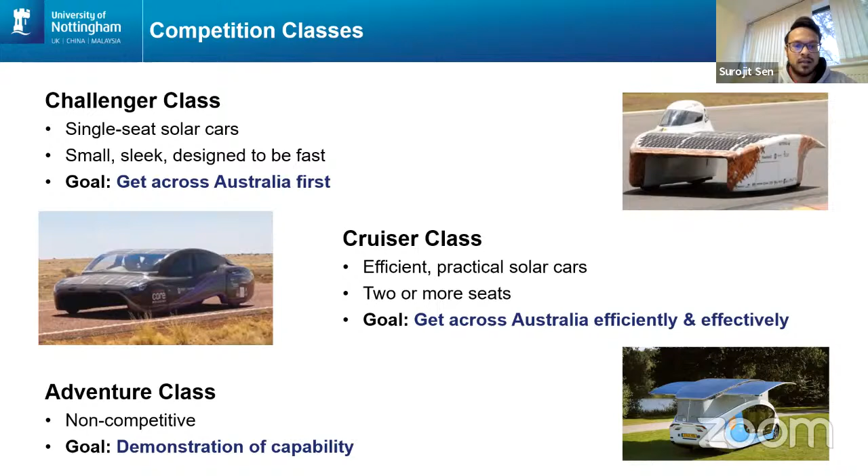Thank you, Alex. Okay, so these are the 3 main classes, and we are planning to enter our first solar car from University of Nottingham in the Cruiser class in 2023 October, which is next year.

So why should we follow the World Solar Challenge? There were several reasons, some of which I have noted down here. It's a showcase for new technology and innovation. Currently the best cars in the world that make efficient use of solar technology enter this competition. So it's not just a student project, it is actually one of the biggest events where the best that the world can offer in terms of solar technology for transportation is presented in this competition. So many people, there's a lot of coverage, a lot of PR for this event.

And also it's a really good competition for students who want to enter the area of sustainability when they graduate. Many big companies recruit students right away attending this competition.

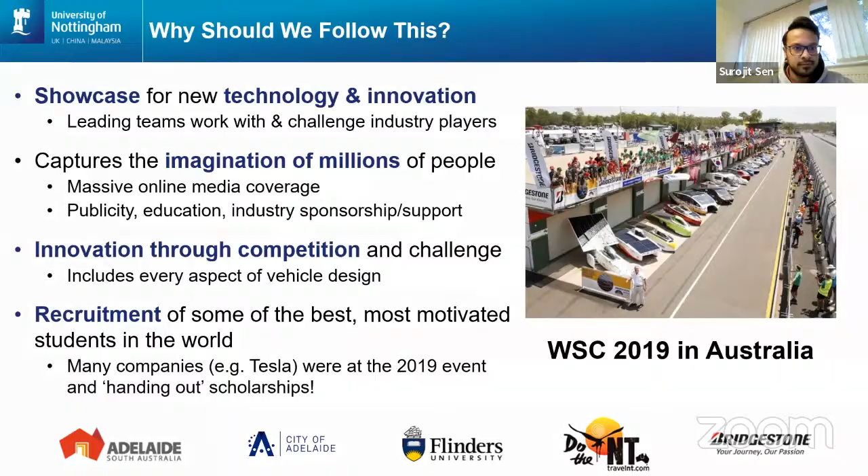All right, so that was about the World Solar Challenge. I'm going to quickly spend a few minutes looking at the top 2 teams as I see it.

So the first one is the University of Eindhoven, which is in Netherlands. They have been doing the Cruiser class for so many years now, and they are by far, in my eyes, the best teams. They're really pushing the envelope in terms of producing cars which are actually very, very practical.

So Eindhoven, in the previous slide, that was a Cruiser class competitor. Now this one is University of Twente, which is again in Netherlands. They really specialize in the Challenger class competition. So this is the single-seater, not practical, but at the cutting edge of the technology.

These cars do the entire 3,000 kilometers with no charging stop. So they start at the start track with a full battery, and they are driving the entire distance purely on solar power. Again, there are quite a few cars they have been building over the last few years.

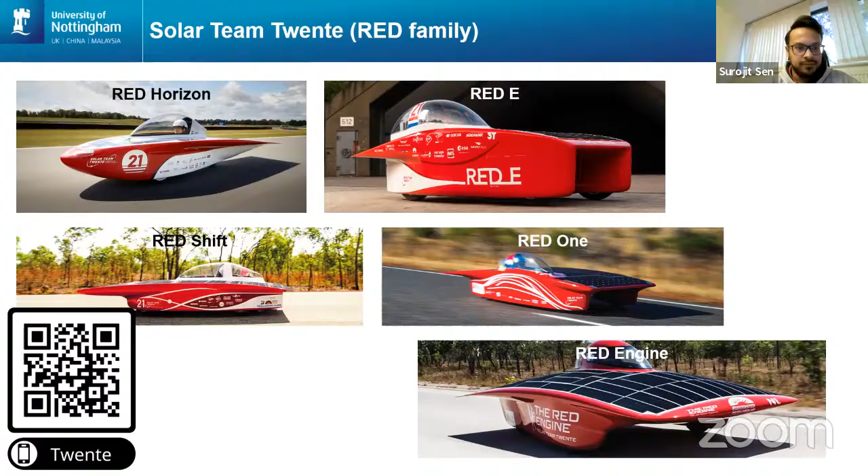Okay, so how to design a practical solar car. Now, this is the most interesting bit of my presentation, I think. We've set the context about what the competition is, why we want to follow that competition, why we want to build a car for that competition, and which are the top teams, so the teams that we really should be aiming for. So now, let's look at how we actually design a practical solar car.

Okay, so it really is a step-by-step process. It's not rocket science. If you just follow a simple set of steps, anyone can build a solar car. It's not that difficult. So the design process happens over a period of 12 months.

That is how we do in the University of Nottingham. So we spend the first 12 months designing a good car, and the next 12 months, it's a 2-year cycle. The next 12 months is focused on manufacturing and testing the vehicle.

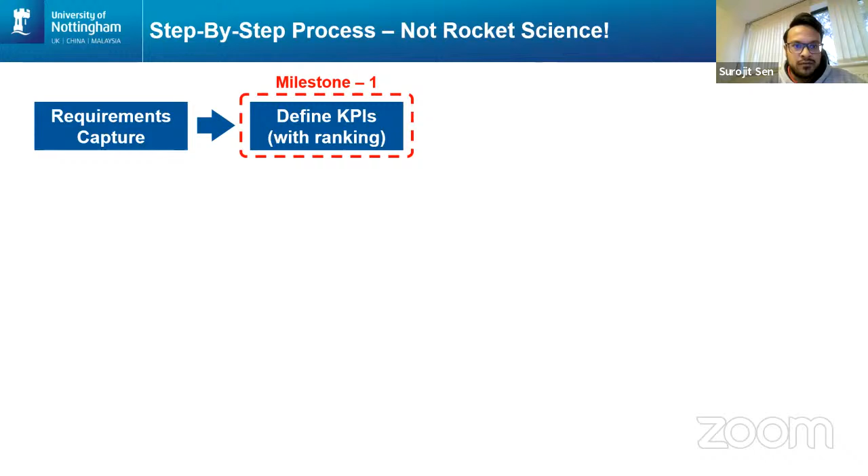Okay, so first milestone is requirements capture and define the KPIs. The KPI stands for key performance indicators. That's milestone number 1. We should be aiming to finish that in the first month of the project, so 1 out of 12 months.

Next milestone is choosing the favorite layout. So after defining the KPIs, we want to explore different layouts of the vehicle. So where the seats go, where the passengers go, where the battery goes, what's the wheelbase of the car, where do we put the wheels, for example. And that's once it's an iterative process, so different vehicle layouts and trying out different aerodynamics of those layouts.

There's a bit of a back and forth in that process, but by the 3rd month of this 12-month project, you want to get to milestone number 2, which is choosing a favorite layout, the one that offers the most promise.

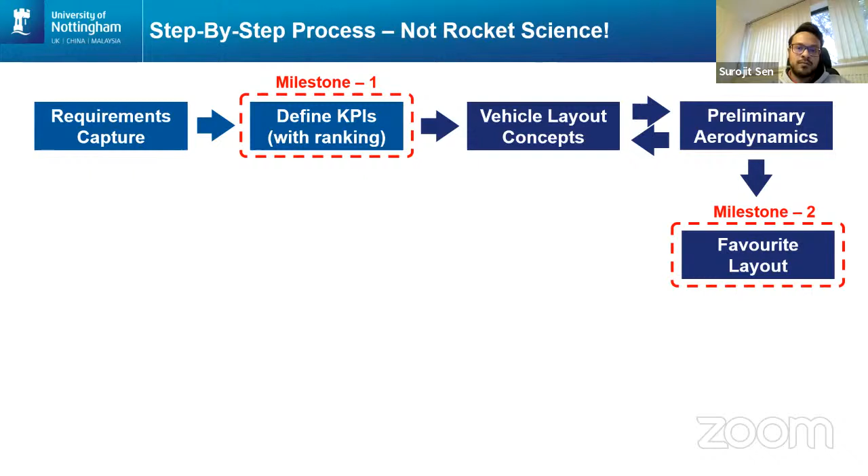Next step is actually starting to design the car. So the first step in the third milestone is to break down into multiple systems. For example, the chassis, the powertrain, the bodywork, the electrical systems are all separate subsystems. So at this stage, after 3 months of the project, the team really wants to split into different subsystems of the vehicle. Each subsystem then goes through a design and validation process.

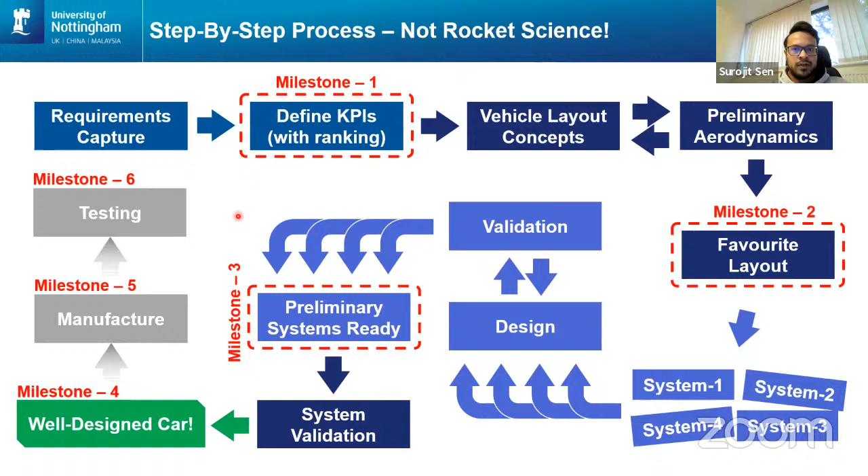The last 2 milestones are milestone 5 and 6, where you actually manufacture and test the car. This would usually happen in year number 2, where you want to spend the first 6 months manufacturing the car and then the latter 6 months testing the car. So hopefully that all makes sense, and we will now go into a bit more detail on milestone 1 and 2.

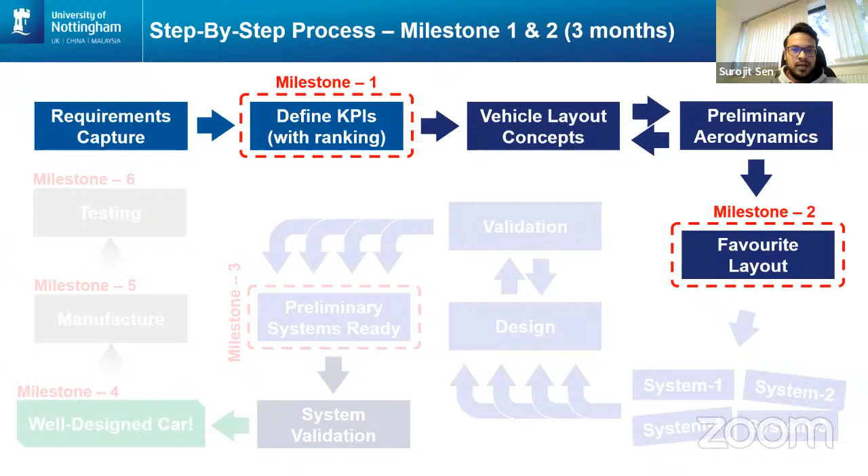As I said, milestones 1 and 2 should ideally be finished in about 3 months of the project, which is about a quarter of the project duration. It is very important to spend some good amount of time talking to people, trying to set targets that are realistic and ambitious together, finding the exact balance between realistic and ambitious. That's very important. It's very easy to start off with one particular concept which you have not explored, so it's very important to have many competing concepts, explore all the ideas possible, and start from a position of informed decision.

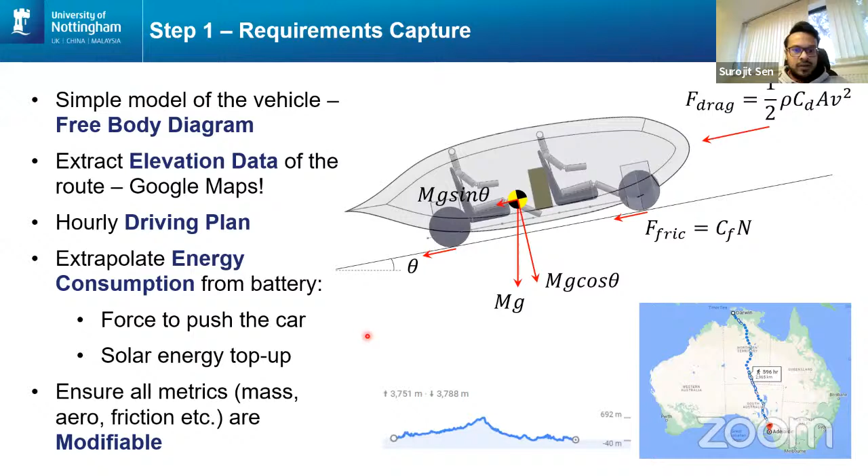From this, you want to extrapolate the energy consumption for the battery, because at the end of the day the whole project is just about making an efficient car. So how do you make a car efficient? You need to make sure that you are consuming the least amount of energy from the battery to push the car through the wind.

Once you've set up a model like this, hopefully you should have something that looks like this. On the top, you can see the vehicle model, which gives a rough estimate of how much energy is needed to drive in each stint of the travel. I've split that into 3 stints, so at each stint you get to charge once. At Tennant Creek, for example, you charge once, and again you can stop at Coober Pedy and charge for the second time.

So this is a very simplistic model based on Microsoft Excel. Many teams do it in a much more complicated way, but as a starting step, you really don't need to go complex. As I said, it's all Newton's law of physics, and it's just school maths, really. So as you can see on the far right, I have estimated the total energy that's consumed from the battery.

Next one is the sensitivity analysis. That's the second most important part of this whole exercise. The sensitivity analysis tells you which metric, like speed or friction, affects the energy consumption the most. At the end of the day, the objective is to minimize energy consumption, so you want to know what metric of the car to change so that you're consuming less energy. That's what sensitivity analysis does.

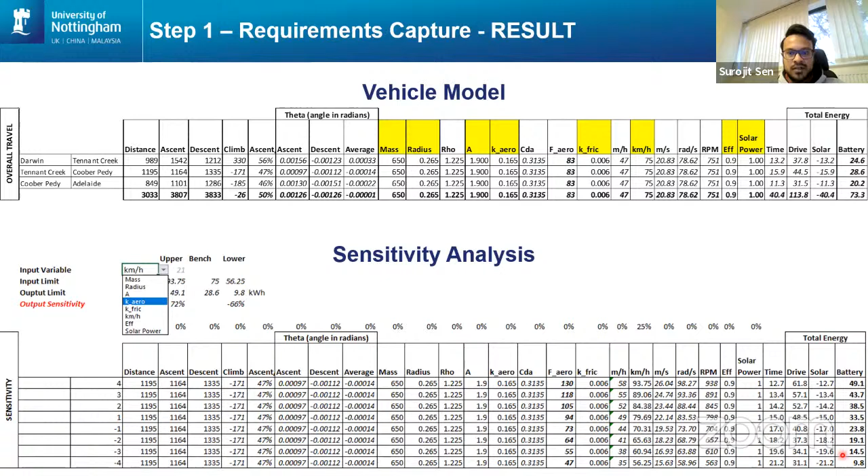Okay, so what we have found based on these analyses is that optimizing aerodynamics is the most important bit, which makes sense because you want to drive efficiently at a decent amount of speed, so you're not driving really slow. Some of you might know aerodynamic drag is directly proportional to the square of the velocity. So as the car drives faster, the maximum amount of energy from the battery is consumed to cut through the wind, basically.

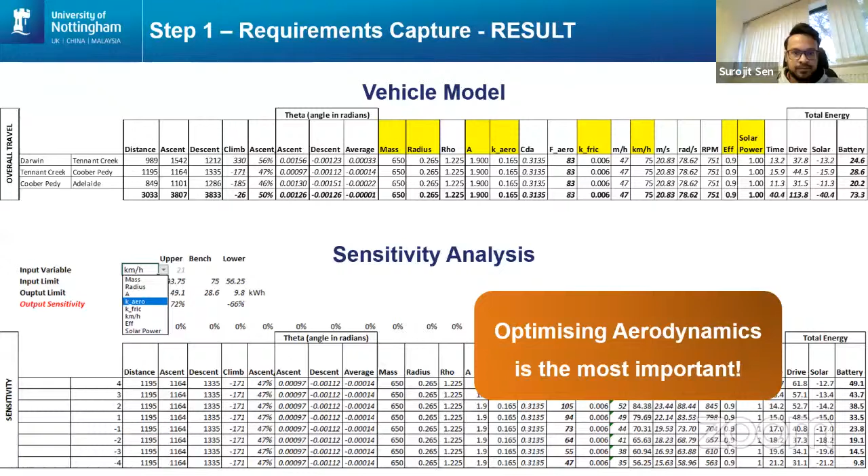So from all of that step, what you want to arrive at is to define a set of key performance indicators, or KPI targets. These are the KPI targets that we have set within the team: coefficient of drag, front cross-sectional area, total weight we have aimed to set below 650 kilos, and the average speed we need to drive the car at is 75 kilometers an hour.

Battery energy consumption, battery energy capacity that we need to make the trips, total maximum weight of the cells, wheelbase and turning radius are again two of the important things you want to set, because you want the car driving on a public highway, so you want it to turn in a desired turning circle. That's the first milestone, and you want to finish all of this in the first month of the project.

You also want to rank them. So you've got a fair number of KPI targets that you want to achieve, and you'll find out once you start the project that they are all competing targets. So if you want to really reduce the battery energy, you may see that the wheelbase is increasing.

So you want to rank all of them in a particular order of priority. In our case, as we said, we want to give the highest rank to the aerodynamic properties, then comes weight, then comes the wheelbase and the turning circle radius.

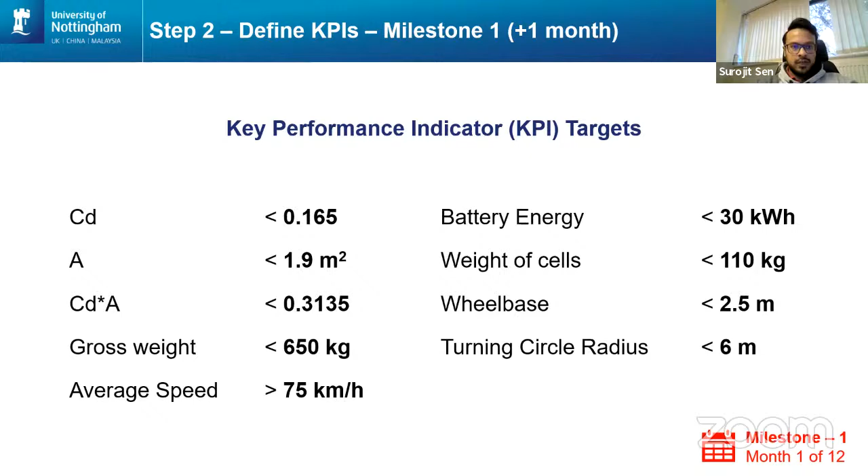Now, step 3, vehicle layout concepts. Once you've finished your first milestone of setting the KPI targets, this is when you want to choose the vehicle layout concepts. As you can see, we have produced several vehicle concepts, six of which have been visualized over here. Different layout concepts have different properties.

So in this one, we've got a two-by-two seating style with a battery in the back. This one has a battery in the front. This one has a battery in the central tunnel, which means the entire wheelbase is shorter, but the width of the car is larger because you have to fit the battery pack in the middle. Similarly, there are other concepts shown over here.

It's very important to explore all the options, because you never know which one is going to come out as the best concept. So at this stage, you want to keep all your options open and see which vehicle is the best.

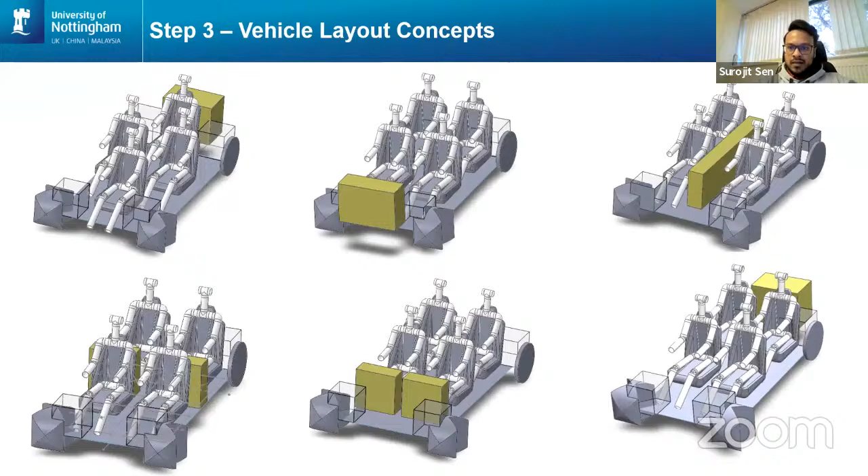Next step, we want to wrap all of these vehicle concepts in a hypothetical bodywork package. As we said, aerodynamic properties optimization is the most important at this stage, so we want to ensure all the bodywork packages are very close to identical to each other, so you can get relatively close and accurate numbers.

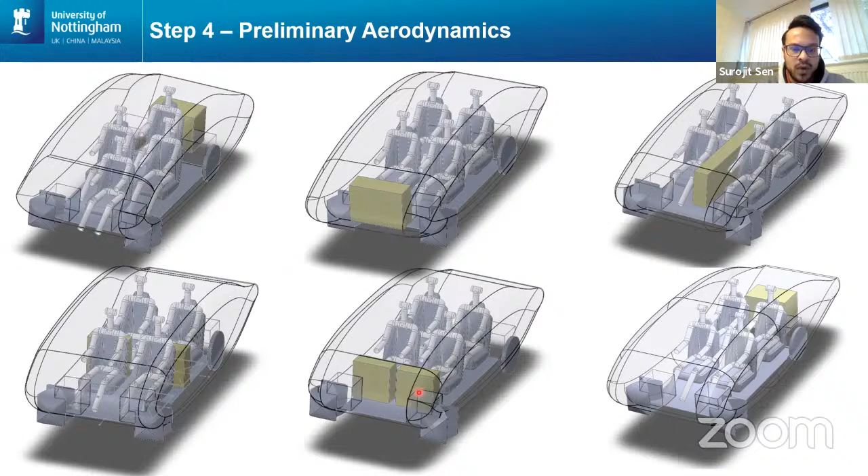So now you take all of this bodywork package and do a CFD simulation on it. CFD stands for computational fluid dynamics. You can check how much air resistance this vehicle would offer when a wind of 75 kilometers per hour is flowing towards it from the front.

So at the end, once you've done all of that, you want to find out what the frontal area and the coefficient of drag values are. So for the 6 concepts we found, we've got a few favorites. Concept 1 and concept number 4 offer the least amount of aerodynamic drag, so we can now say with a bit more confidence that concept number 4 is the one we should be going for.

It's very important to keep in mind that these numbers are not going to be accurate in real life, because simulation never gives you realistic numbers. What it offers is a relative impression of which concept is better than the other 5. So it's all relative, not accurate at the moment.

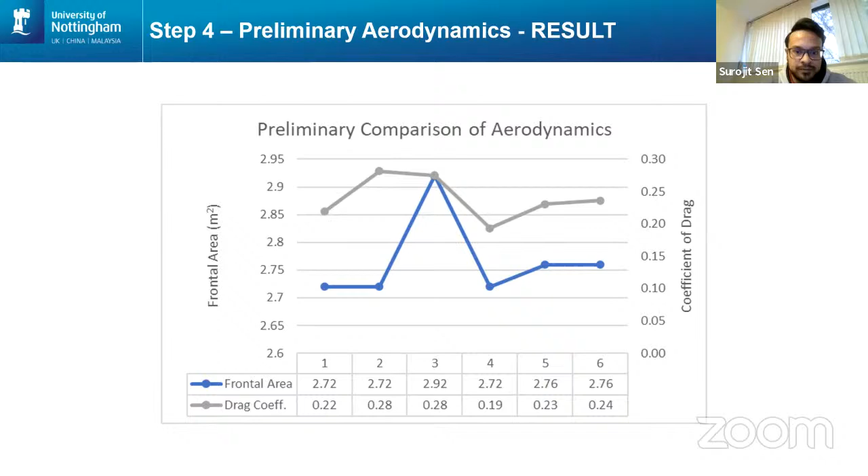Right, step number 5, choosing a favorite concept. That's milestone number 2. This step took 2 more months, so now you are in month 3 of the project. The things to look out for: do not blindly believe the numbers thrown by the simulation software. They are almost never accurate without doing benchmark testing.

Up until this stage, it's all a group effort. All of the different subsystem groups need to work together in this project. It's very important to have a good, open line of communication between the different engineering departments. You also need to talk to experienced people — what experience offers is unparalleled. You really want to talk to people who have done this before.

Lastly, think about the stuff you can buy off the shelf, since building your own thing every time is not the best idea. There are a few questions you want to ask when choosing which concept has the best aerodynamic properties. A simple solution is also very important — as a first car, you want to build a really simple design. Which one's least costly, which one is the lightest, which one has the most solar irradiance on it, and so on.

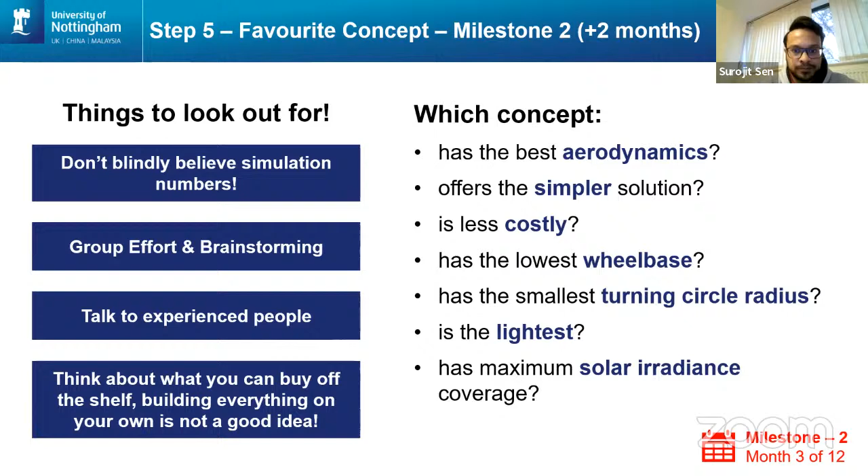Right, hopefully all of that has made sense so far. Now we are going towards milestone number 3. This is where, now that we've chosen a favorite concept, we can break the group down into individual subsystems and work in a more isolated fashion, so different groups can work on their bit of the car independently.

So as you can see, systems have been broken down. They all go through an iterative process between design and validation — you start with design and validate it for various metrics. We'll talk about what the validation and design steps are for each subsystem in the next few slides. Once you've done that, you want to arrive at a preliminary system, once all the subsystems are designed and partially validated, brought together — that's milestone number 3.

You want to spend about another 3 months getting to milestone number 3. So all of this should take 3 more months, and now you're at month number 6 — you're halfway there.

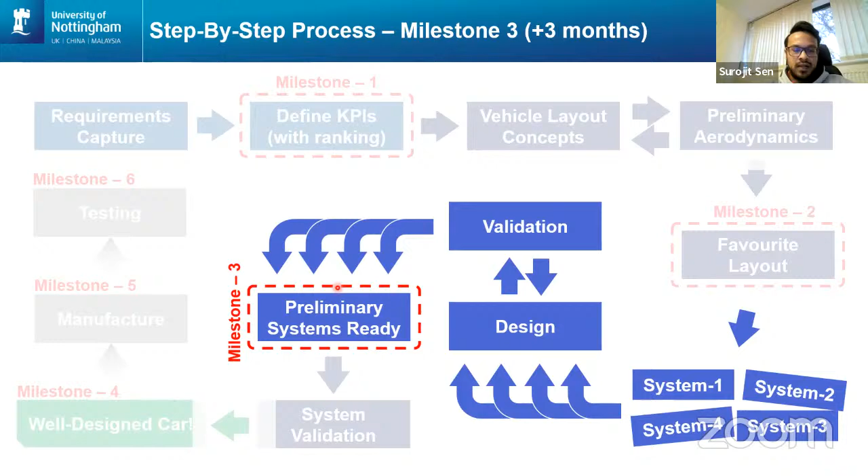One thing I'd like to clarify: with our solar car project, we are currently in milestone number 2 — we've chosen a favorite layout, but we're in the process of going through the later stages. Just a quick clarification, all the screenshots and pictures you see now are going to be for our Formula Student car, a project we've been working on for the last several years, about 5 years now. But at the end of the day, a car is a car — the KPIs are different, but the design and validation process is simple and very similar.

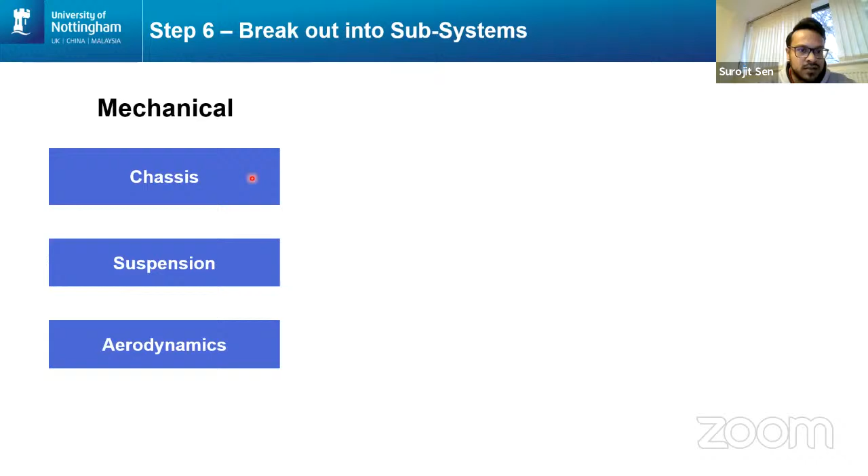Right, break out into subsystems. There are 3 main subsystems in the mechanical discipline: chassis, suspension, and aerodynamic and bodywork package.

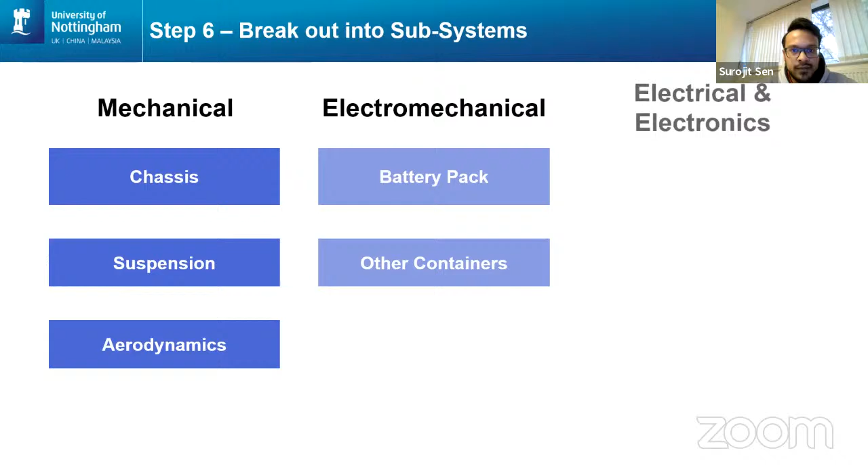Electromechanical — since it's an electric car, we have to look at the electrical aspect of it. The battery pack and other containers for electrical components fall under the electromechanical subdivision. Electrical and electronics purely doesn't have much interference from the mechanical engineers, and we're looking at hardware and wiring, electronics and PCB — PCB stands for printed circuit board — and the software aspect of it.

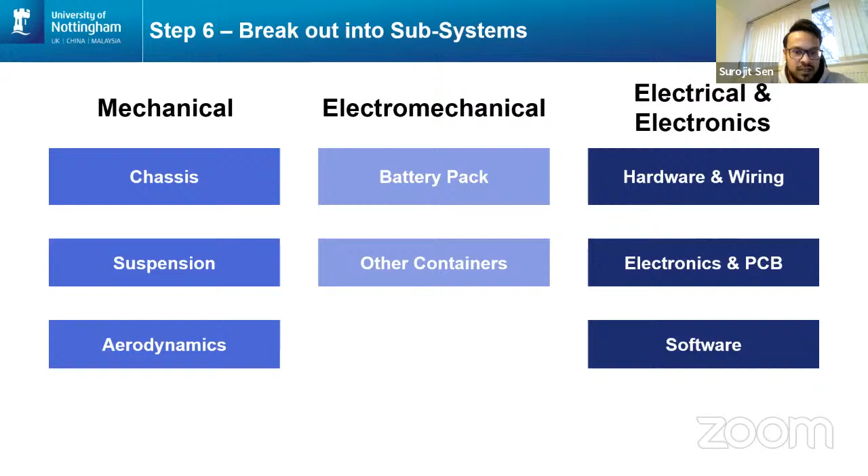So these are broadly the 8 subsystems or subgroups that the team is split into — these are the engineering teams. Of course, no team is complete without the non-engineering, non-technical aspects, so we have to look at the support teams as well. At the University of Nottingham, we've got a business development team, a public relations and marketing team, a procurement team — obviously you want to buy things, just designing something isn't going to help you — and the management and HR team, where the different teams and members are managed and tasks are set.

Okay, so in this presentation we'd only be talking about the technical aspects, but again, we cannot forget about the support and non-technical teams, which are absolutely crucial.

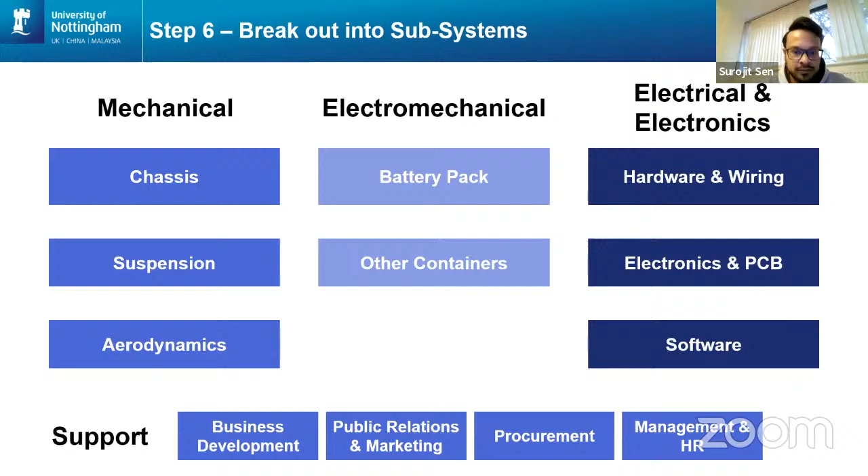Right, step number 7 and 8, design and validation. This is for the mechanical engineering groups.

As you can see in the pictures, we've got a chassis, which is nothing but the structure of the car, which holds everything together in place. At the end of the day, if you think about a chassis, it's just a big bracket to hold everything in place. You've got the suspension, which connects the wheels to the chassis, and the aerodynamics package, which is the third subsystem in mechanical engineering.

The way you start designing this is you always start with the tires, the wheels. The suspension teams define what geometry they think would be best for the car. From there, you start working on the powertrain, which we'll talk about in a bit. The battery boxes are defined, and then finally the chassis group tries to create a space frame structure to hold everything together. The last step is the aerodynamics, which is defining a bodywork that offers the least amount of resistance when cutting through the air.

In terms of validation, the bits in red are the validation aspects. FEA, or finite element analysis - in software, you can check how much stress and how much deformation happens when you load the structure in various ways. So for example, in the chassis, when the car hits a bump, or brakes hard, or is actually involved in a crash, you want to ensure that the chassis doesn't just break apart, fall apart, and crumble under those stresses.

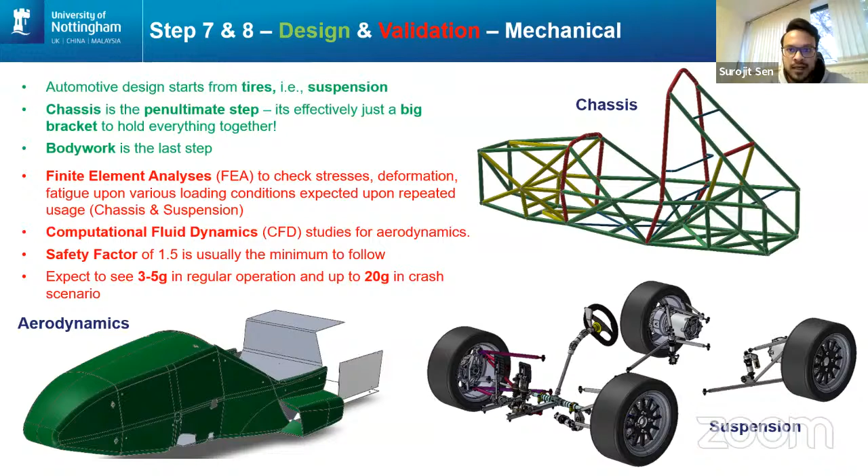Now we come to the electromechanical groups. I think this is the most tricky part of the project, because first of all, it's electro and mechanical - so this is multidisciplinary. Both the electrical team and the mechanical team are very tightly intertwined in the design and validation process, so there needs to be a really good channel of dialogue between the two teams.

The bits covered in this area are the battery pack. You design the battery pack, starting off from the battery module. This is designed with cylindrical cells, so you start off with the design process of the segments, then you have multiple segments in the battery pack. At the end of the day, you want a design which can take various stresses.

So again, you do FEA on the battery pack, and you want to stress it at least 10 to 20G stress conditions to ensure the battery doesn't crumble in a crash situation and there isn't a fire.

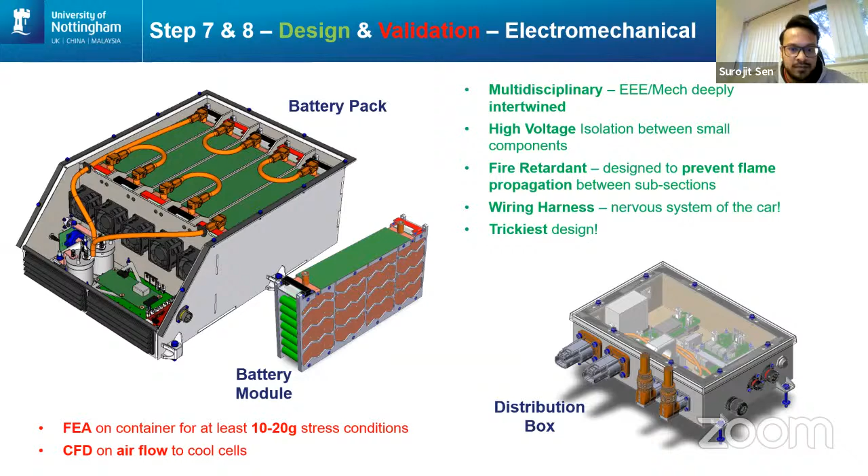Lastly, electrical and electronics. This is where all the electrical and electronics team members come together and define the various electronic packages. For example, the accelerator pedal has sensors on it, so defining the sensors comes under them. Printed circuit boards, or PCBs - all of the custom electronics are designed, assembled and manufactured by the electrical and electronics team. This also includes the electrical logic.

And lastly, software. Software is the brain of the car - you need to tell the car how to behave upon different conditions. In terms of validation, all the PCB circuits are simulated in software like PSpice. Software is again something which takes 90% of the time to develop with validation - it only takes 10% of the time to actually write the lines of code. So debugging and testing with the hardware is often the most important and critical part of software.

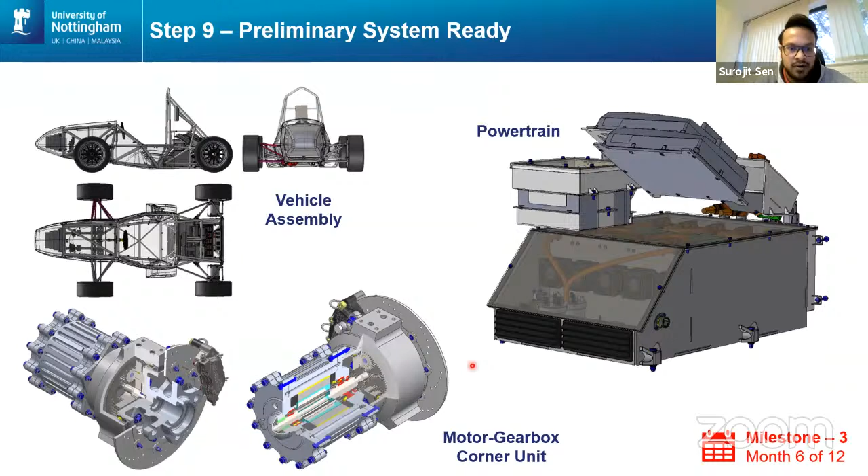You can see the vehicle assembly on the top left, the powertrain, the drivetrain of the Formula Student car that we have, which is the motor - attached to a gearbox and then attached to the wheels on this end. This is the entire powertrain package: the battery pack, the low voltage 12-volt battery, the vehicle control unit - that's the brain of the car. You've got 2 motor drives and the distribution box on this end.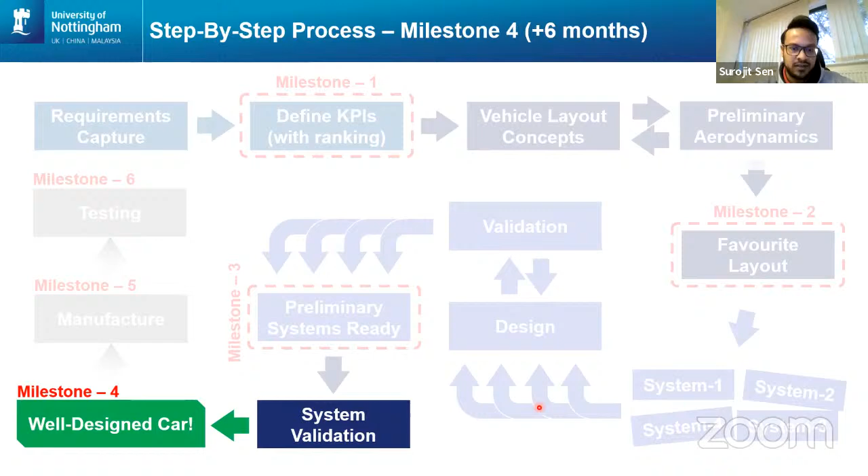System validation - we've got mechanical and electrical electronics. In mechanical engineering, you want to make sure that all of the designs, all of the CAD works are now fleshed out in more detail. You want to start putting together the nuts and bolts in the CAD, in the drawing, and also look at the small bracketries that need to be defined. Another really important thing which often gets missed is: is it all assembled? Can you assemble all of this in a proper way? Can you reach these nuts and bolts with a spanner once everything's in place? That's also a key thing to look at.

In electrical electronics, you want to do system simulation and test the hardware. You can see in this picture we are testing the motor corner unit in a dyno, just making sure that the motor drives in an expected manner. This also lets you test the software as well.

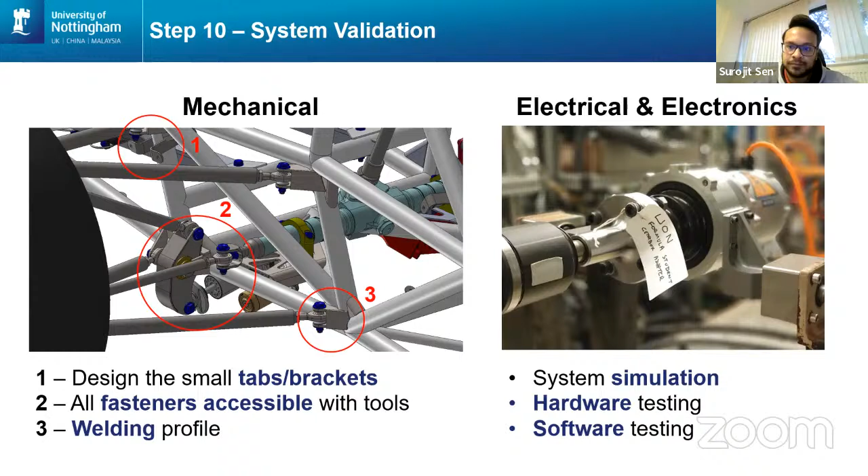Step number 11, final design approval - this is milestone number 4. This is, in theory, the end of the design process. You spent another 6 months putting everything together and you've got a well-designed car in theory. At this stage you want to look at product availability - all of the things you need to buy, all the consumables, all the metal sheets, metal tubes, tires, wheels, nuts and bolts, cables - do you have all of that available? At this stage, now that you've got a very well-defined car, you're also looking at the total weight of the car - have you met your expectations, have you met your KPIs? Total cost of the car as well, and total carbon - that's also a very important thing in the modern world. You want to make sure you've got a reasonable amount of carbon that has been put into the process of putting the car together. You end up with a final bill of materials, and that's when the procurement department takes over and starts buying things to put together.

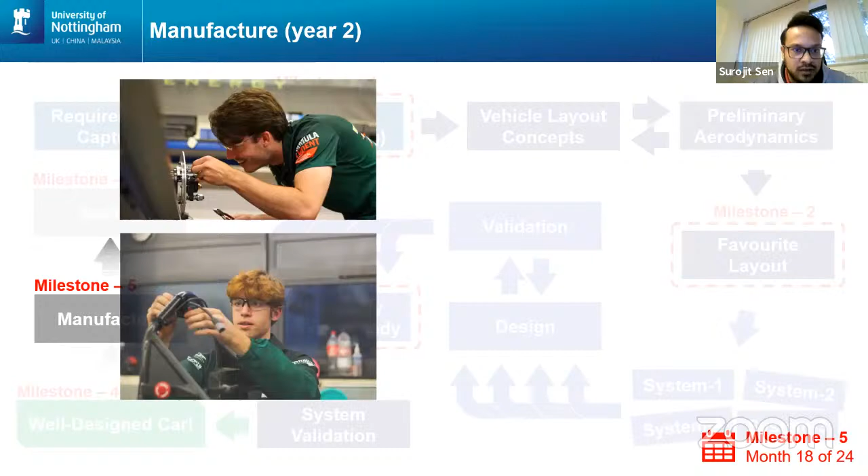Right, okay, so that's step 11, the final step of the design process. We've got manufacturing, year number 2. As you can see, we've got some pictures.

That's the solar car, our first generation solar car, the Renault Twizy, which is in the process of production. That's our Formula Student car, which is again in pieces at the moment. These are some pictures from last year. We are about a few months before the event, and you can see everything is being built together, with many people working towards building this. This is the old car, and the new car is being built for Formula Student over here.

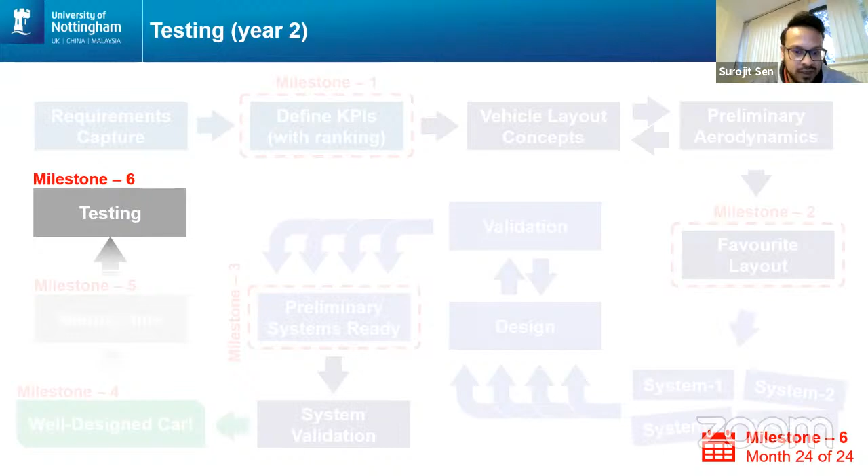Testing, that's again the later half of year number 2, a very important step in the process. You want to test the car. As you can see in Formula Student, it's an electric car, so we do a rain test as well, sprinkling water from different directions for a full 2 minutes and ensuring the car doesn't catch fire. We do some driving tests as well, and a tilt test, tilting the car up to a 60-degree angle to make sure it doesn't fall over.

So hopefully, if everything has gone as per plan, you're now in month number 24, the end of the 2-year design process. You would have a car which has been designed very well in the first year, built and tested appropriately in the second year.

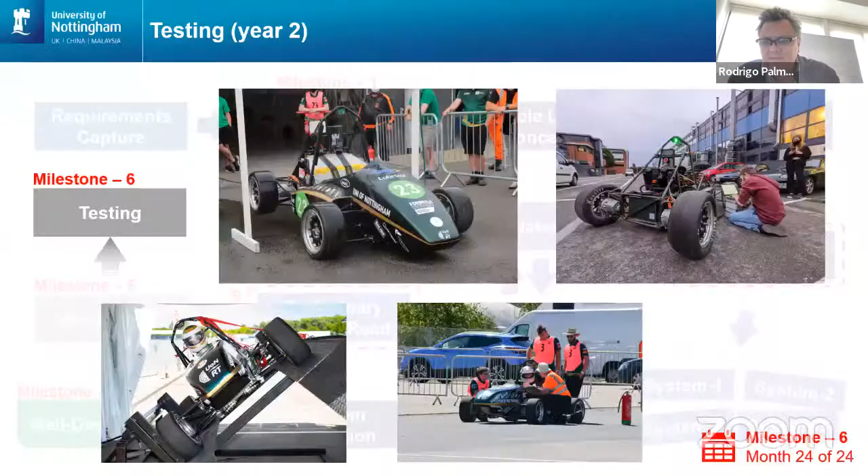But I start with the question from Shriha. In step 8, electrical system design, you mentioned that 90% of the software development time goes to testing, but hardware won't be ready at this stage. What can the team do to support debugging in realistic conditions to iron out issues as early as possible?

So that's a good question. Thank you, Shrija, and thank you, Rodrigo, Professor Palma, for the introduction of University of Chile and welcoming me to present this in this webinar. Thank you very much. So coming back to the question, if I understand correctly, you've asked what steps we can take to ensure we iron out the issues well in advance.

So I think there are two things to look at here. We need to think about the fact that a lot of the software can actually be debugged in software itself, without coming to hardware. There are software simulations often used by the software engineers, but also a lot of that cannot be done without physical hardware. So at this stage, although we said we're not doing any production in the first year, the electrical electronics team actually ends up producing a lot of prototypes in hardware as well. So PCBs are often produced in the first year, the design year, manufactured specifically to aid in the debugging process.

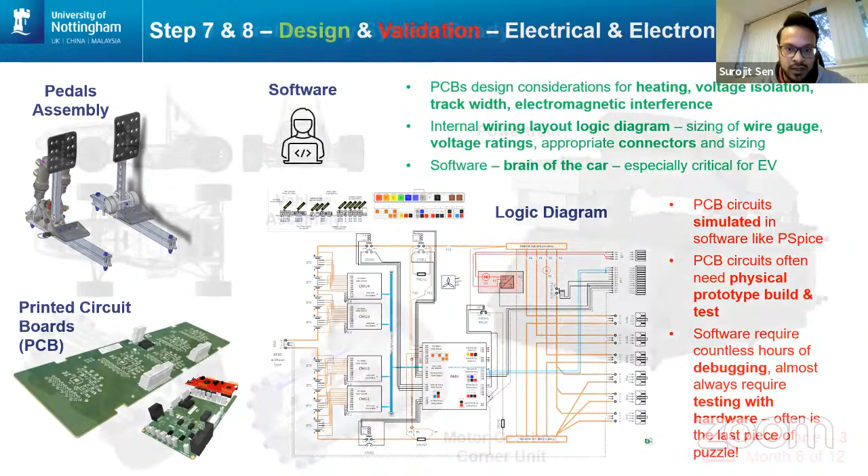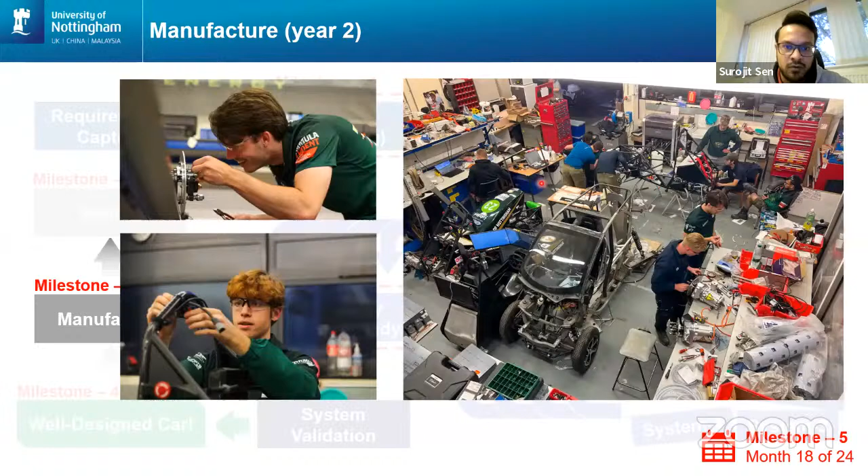We are also going with a 4-seat approach for the second generation design, but the first generation, the one in the picture you saw, that's the first generation car. We started with a Renault Twizy, which is a road-going car. That's the first generation car. We've heavily modified the chassis and suspension, and we're planning to retrofit it as a solar car with a big roof on it with the solar panels. We plan to take that car once it's finished building and testing over to Australia, if we are able to go.

Great, incredible. I'm happy that the leader of the Chilean team at the University of Chile, Alejandra Holguín, is a lady. This is also very interesting for us to move things here in Chile. How did you deal, and perhaps Alejandra, if you want to make the question directly, you can take the microphone. But how did you deal with the pandemic? What was the most difficult thing?

Yeah, I guess that's a question every team has had to face. Thank you for the question. The way we dealt with the pandemic was, purely from the solar car point of view, we didn't start until the pandemic was almost on the decline. So we started the project in 2021. We did face the brunt of the pandemic during our 2020 Formula Student build year. The way we dealt with it was we kept the number of people inside the workshop to a minimum level. Unless someone was particularly required to attend in the build phase, we didn't let them come. We did move to a lot of remote studies in the design phase. As it turns out, we really do not need to be facing each other physically to design a vehicle. So the entire first year of the project, the design phase, can be done remotely. That's one of the blessings of the pandemic - people around the world got to realize that a lot of things can be done remotely.